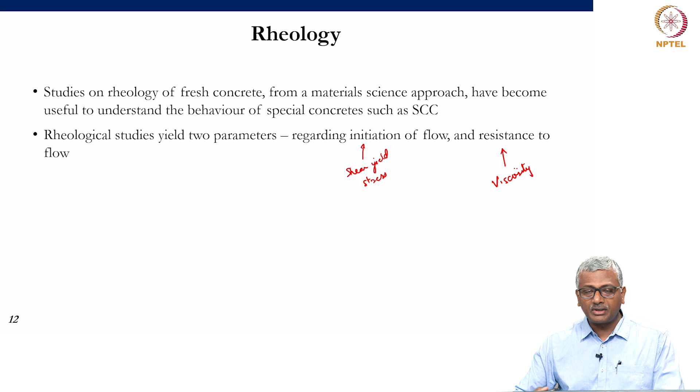Before that, let us look at some models which define flow behavior of construction materials, polymeric gels, and all kinds of flowable materials. You know that water follows a Newtonian behavior - as soon as you shear water, it starts flowing and there is a constant viscosity of flow. Typical rheology plots are drawn between shear stress and shear strain rate, and a Newtonian behavior starts at the origin and is a straight line with a slope equal to the viscosity of the material. Water, oil, all of these are viscous with a Newtonian behavior.

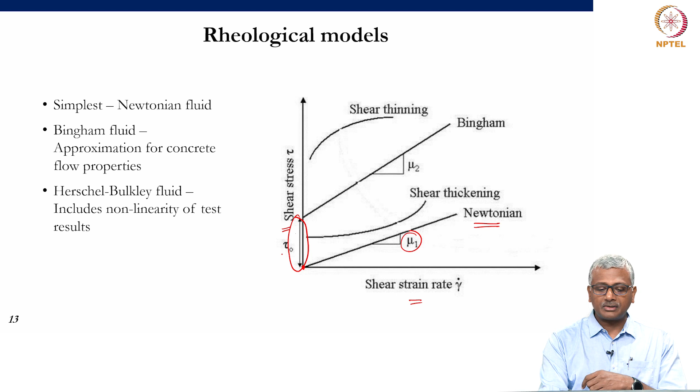A Bingham fluid is a material that has to overcome some initial shear stress, represented here as tau naught or shear yield stress. Once you overcome that initial shear yield stress, the particles can start to flow. And once it flows in a Bingham model, the flow happens with a constant viscosity.

But this need not always happen with systems which are suspended solids in a liquid medium like concrete. You can also get some non-linearity, and for such instances, the Herschel-Bulkley fluid model is often used for concrete. In such cases, you do not have a constant viscosity, but the viscosity changes as a function of the shear rate. In concrete, mostly what we see is a shear thinning behavior, where as the shear rate increases, the viscosity tends to drop.

On the other hand, for certain gums and glues, you may end up having a shear thickening behavior, where when you increase the shear rate, your viscosity tends to go up. But in both these cases, the curve may or may not start from the origin, indicating that the suspensions may have some initial shear yield stress that needs to be overcome for flow to initiate.

Now, in simple terms, let us take a look at what this means physically for concrete. Concrete is a composite material where aggregates, that is coarse and fine aggregates, are suspended in the cement paste. As we said earlier, cement paste flows, and the aggregates are basically carried by the cement paste. So the more the aggregate, the more difficult it will be for the cement paste to carry the materials. That is why when you have more paste, the workability is more.

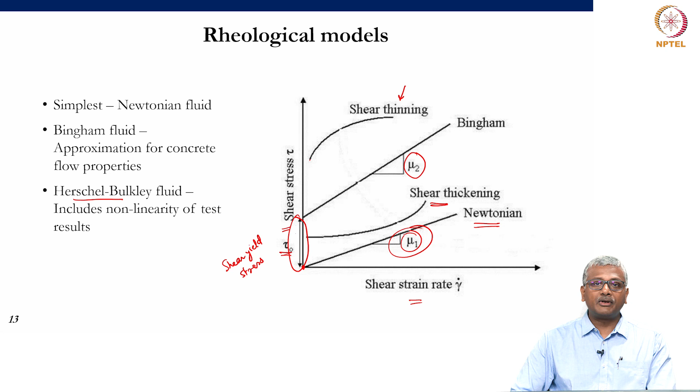That is why we get this relationship here, that viscosity is more or less constant for a laminar flow. The plastic viscosity of concrete can be defined as the plastic viscosity of paste mu naught multiplied by some function of the volume fraction of the aggregate particles. The more the aggregate, the more difficult for the paste to carry this aggregate along with it. So if the paste is less viscous, it still has to carry a lot of aggregate with it, and the overall concrete viscosity will suffer if you have too much aggregate in the system.

For a flowable concrete like a self-compacting concrete, both yield stress and plastic viscosity will be lower. But plastic viscosity cannot be lowered beyond a certain point because that will lead to segregation. So rheological control can help design workability of the concrete in a much more efficient manner, and this can be done with simple experiments. Of course, that is not the target of our understanding here.

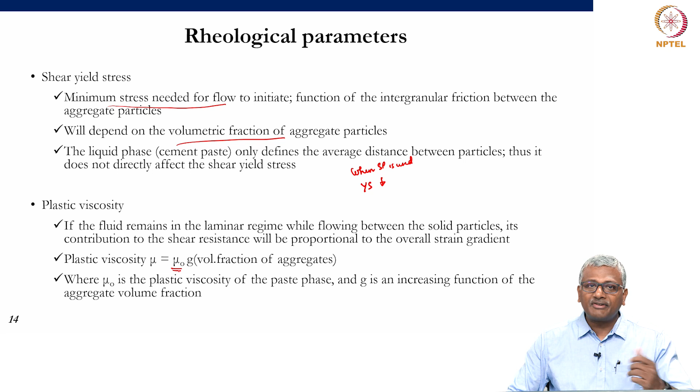When you compare the texture of the recycled concrete aggregate as opposed to a natural aggregate, you can imagine there will be a lot more roughness on the surface because of the adhered mortar. The shape will not be as well defined, because of which the intergranular friction is going to go up. This adhered mortar, which is porous, will also tend to absorb some of the water and cement paste from the surrounding paste. As a result, the viscosity of the paste also will go up, leading to a higher plastic viscosity in the system. So when normal aggregate is replaced by recycled concrete aggregate, you can expect a change in the rheological behavior of the system in terms of both an increase in yield stress and an increase in viscosity.

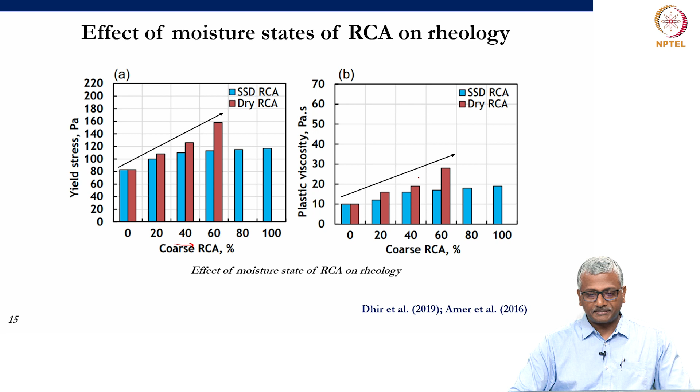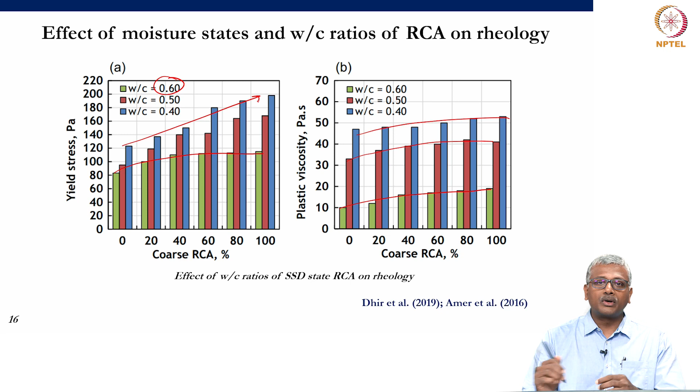Just to get you an understanding of what this is - in self-compacting concrete, because of the extreme flowability, there is a tendency for the aggregates to settle or segregate as compared to the paste. If you do not design your concrete well, that is likely to happen because of the extremely flowable nature of the material. So in a segregation test, what is typically done is the fresh concrete is poured into a bucket. You then wait for 15 minutes, then separate the top one-third of the bucket and the bottom part of the bucket and determine the extent of aggregate that is present in the two locations.

If there is a lot of segregation, the amount of aggregate actually present in the top one-third or one-half of the bucket is not going to be equivalent to the amount of aggregate in the actual mixture. So you can define what is called a segregation ratio.

Segregation ratios depending upon the extent of fine aggregate replacement by recycled fine aggregate did not really vary that much. But in one case at higher water cement ratio, they found that with increase in the extent of recycled fine aggregate, the segregation ratio increased, but it still only ranged between 8.9 and 11.1. It's not really that much.

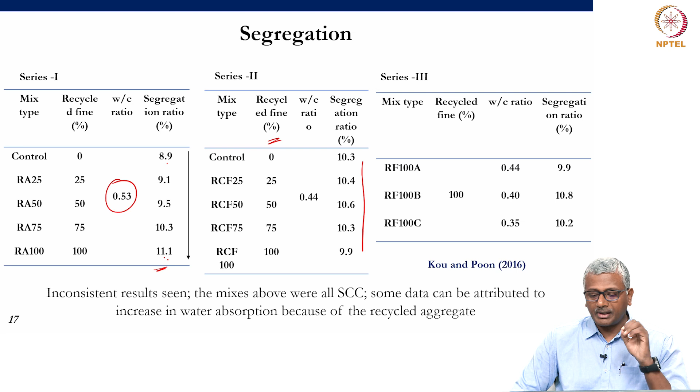Now, when it comes to bleeding, we know that bleeding happens when there is a lot of free water that tends to rise up to the surface. What will happen when recycled concrete aggregate is there? If this recycled concrete aggregate has adhered mortar, it will tend to also absorb the bleed water. So, as a result, when normal aggregate is replaced by recycled concrete aggregate, you should see some level of reduction in bleeding.

Indeed, that is what is shown by the study by Yang et al., where the amount of bleeding was measured with respect to elapsed time. For the control concrete, the extent of bleeding is significant. As you use different types or grades of recycled concrete aggregate, the extent of bleeding comes down significantly. So this goes to show the adhered mortar is beneficial with respect to reduction in bleeding.

This also shows the total amount of bleeding with respect to the relative water absorption in the aggregate. As the water absorption in the aggregate increases, the relative amount of bleeding gets reduced. This again says that the porosity caused by the adhered mortar in the recycled concrete aggregate leads to higher water absorption, and this water is also absorbing the bleed water, thus preventing additional water from rising to the surface.

Now, this can have positive and negative connotations. For instance, when you use concrete with recycled concrete aggregate, you need to be aware that since bleed water is now not reaching the surface, you have to protect the surface early in the case of a flowable concrete, for instance self-compacting concrete.

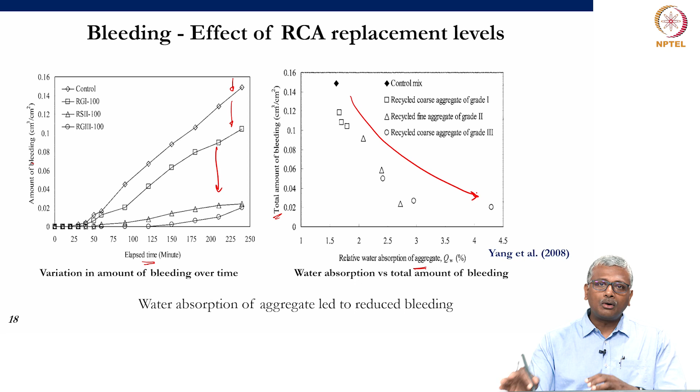Again, air content: you have more fissures and cracks and pores present in the adhered mortar, because of which you can see a minor increase in the air content of the concrete with respect to conventional aggregate. You can see from this data that the effect is not really significant, there is some increase, but it is not really that significant.

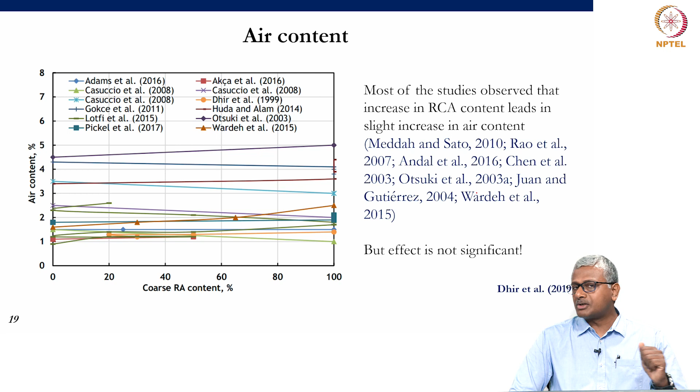As long as you are designing air entrained concrete with proper distribution of air bubbles caused by the presence of the air entraining admixture, you do not really need to worry too much about the fact that you are replacing conventional aggregate with recycled concrete aggregate. It is not going to totally throw away your result of the air content too much.

Now, in some instances, there was a very interesting paper by Huda and Alam, where they looked at the generation of the recycled aggregate. What do they mean by generation? From the landfill, they collect aggregates, which is the first generation recycled aggregate, and prepare concrete with it. They then crush this concrete and prepare the second generation of recycled aggregate and prepare one more concrete with it. Then they crush that concrete and prepare one more recycled aggregate concrete with it. So this is like three generations of recycled concrete aggregate, and what they wanted to see is how the property of the concrete changes as you keep changing this generation of the recycled aggregate.

Here what they saw is there was a minor increase in the air content as compared to the control. When you go for additional cycles of recycling, you tend to increase the air content and reduce the slump. Your slump is reducing somewhat because again there will be a change in the absorption characteristics of the aggregate, and you are probably going to be introducing more air. So there will be an increase in the adhered mortar content as you go for further and further generations of your recycled concrete aggregate.

And because of the continuous crushing and reforming, you are probably increasing the roughness of the RCA also, which is going to lead to this increase in air content and decrease in slump. But of course, this is only a study done out of interest. You don't probably know when you collect aggregates from a dump yard how many times they've been recycled. You have no idea. But you need to study if the aggregate characteristics are good enough to be used in concrete and then design your concrete accordingly.

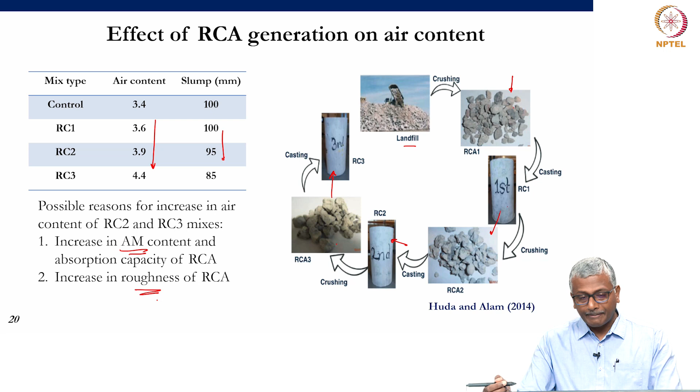Now, when you replace conventional aggregate by recycled concrete aggregate, it is expected that the density of the concrete will drop. Why is this? Because adhered mortar is present, there will be water absorption, there will be higher porosity because of the water absorption. Water absorption is not the critical factor for density; it is more the porosity introduced by the adhered mortar that will lead to the lowering of overall density. So you need to be aware that your density will change when you replace conventional aggregate with recycled concrete aggregate. When you do better processing of your recycled aggregate, the differences in density will not be that significant.

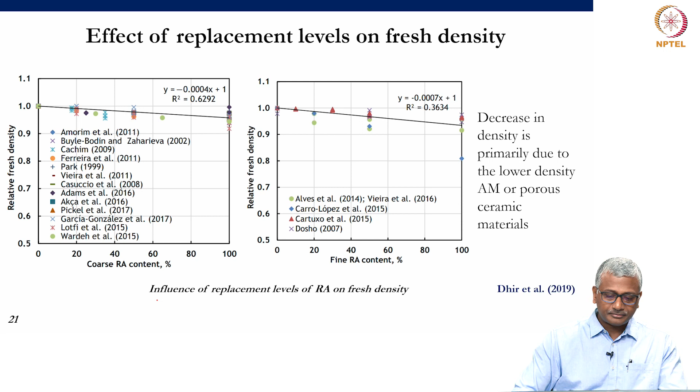Now, let me show you a case study of the use of recycled concrete aggregate in an application at the other end of the spectrum. I talked about flowable concretes and high workability, but let's now talk about a very stiff concrete such as roller compacted concrete, where the concrete is dumped and then compacted with rollers.

Primarily it's used for roller compacted concrete pavements, which basically have zero slump. That means workability is zero, or very harsh mixes, with low water content. Typically even the cement content is quite low because you don't really need so much cement to produce the workability. You just need to control water to cement ratio to get the strength, but the entire concrete is getting compacted to a very high level of densification. There is typically no reinforcing steel in such concrete because it's used for applications like pavements and dams.

And you can actually make it strong enough because of the kind of compaction process that you give. Because of using lower cement, you are reducing the costs significantly. And because there is less cement, there is also going to be less heat emanation from the concrete. So there is a lot of advantage of roller compacted concrete pavements as opposed to typical concrete used for pavement quality construction.

So what essentially can be done in roller compacted concrete pavements, because you do not need much slump at all, is think about utilizing recycled concrete aggregate for such purposes. But the issue is you need to figure out whether the roller compaction, the application of pressure by the roller, is going to be as effective in concrete with recycled aggregate as it is with conventional aggregate. So now, is your recycled concrete aggregate affecting compaction? That is the challenge in recycled concrete roller compacted concrete pavements.

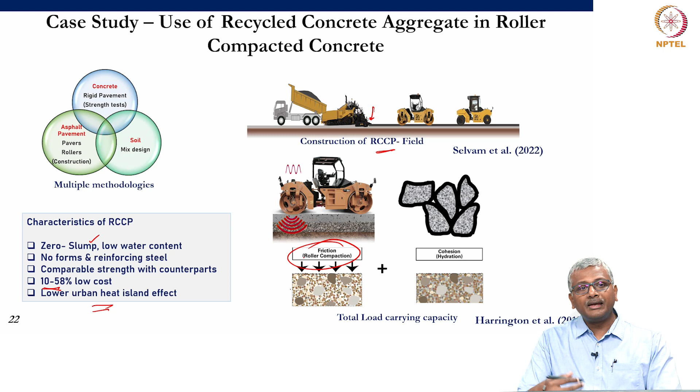We earlier talked about workability, but compaction, as you all know, is also a feature which defines workability. So let us take a look at what happens when recycled aggregate is used in roller compacted concrete, and whether we can achieve the same level of compaction or not.

So now what we can try to do is design the roller compacted concrete pavement with an optimal choice of gradation of aggregate. We typically work with coarse aggregate of two sizes, 20 millimeters and 12 millimeters, and one fine aggregate less than 4.75 mm. So now you have three different blends of material that need to be proportioned in a way that gives you maximum compaction, which generally can be achieved by maximizing what is known as the packing density of the aggregate.

Now what you are simply doing is, let's say you have a container, you are filling the container with coarse particles first. There are voids and gaps between these coarse particles which you have to identify properly, understanding what voids will remain after efficient packing of this size particle. Those voids you start filling up with smaller particles, and then you recognize the voids in that mixture and fill it up with even smaller particles, and so on. So essentially you are adjusting your sizes so that the voids left behind by one size are nicely filled up by particles of the smaller size, ad infinitum.

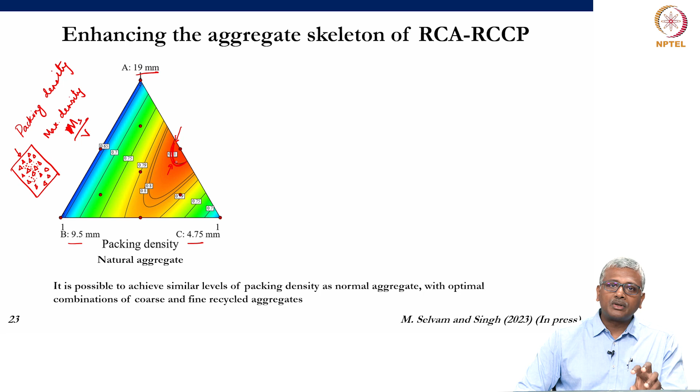What you see here through this ternary diagram is that you are able to achieve, for certain compositions, a packing density of 0.81. That is a contour of packing densities that can be obtained by combining aggregates in proportions leading to this packing density. So what you need to do is understand the particle gradation of your recycled concrete aggregate and design the proportion appropriately to get the maximum packing density.

In this study, for normal aggregate, the packing density obtained was 0.81 for an optimal choice of fine aggregate and coarse aggregate. For instance, 19.5 millimeter aggregate was about 35%, 9.5 millimeter aggregate was 15%, and fine aggregate was about 50%. At this level, they got an optimal packing density of 0.81.

That means if you take a volume of container, 81% of the volume is filled up by solids of the aggregate, or you get 19% voids in the system. So you can think about maximizing packing density as also the same function as minimizing the void fraction.

Now when you have recycled concrete aggregate of different proportions, here only recycled coarse aggregate was used, of two different sizes, 19 mm and 9.5 mm. You can see that for 40% 19 mm aggregate, 15% recycled concrete aggregate of 9.5 mm, and natural fine aggregate at 45%, they are able to get the same or even better packing density compared to natural aggregate.

Similarly, for proportions of normal concrete aggregate, normal coarse aggregate at 30% and about 25% in the case of coarse aggregate, and about 50% of the recycled fine aggregate, you are now able to get the same packing density as the normal aggregate.

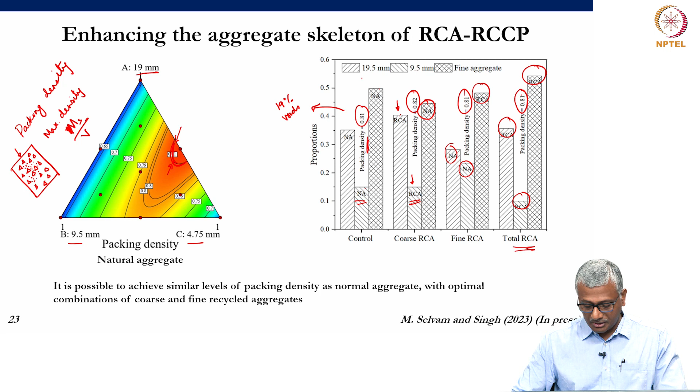Now, you can also optimize moisture states of the RCA. We know that because of the adhered mortar content, the recycled concrete aggregate may have a lot of surface moisture, and that needs to be compensated by achieving a saturated surface dry state.

But when you design concrete with chemical admixtures like superplasticizers, which tend to adsorb on the surface of cement particles and also aggregate particles and lead to a repulsion effect, does that help us in achieving better compaction in roller compacted concrete? We saw that packing densities could be achieved, but when you actually do the concrete mix design with cement, chemical admixtures, and water, are we able to get the same level of compaction or not?

So generally, the use of superplasticizers will improve the lubrication effect, not just in cement or cement paste, but also in concrete, because superplasticizers also tend to get themselves coated around aggregate particles and provide some level of steric repulsion.

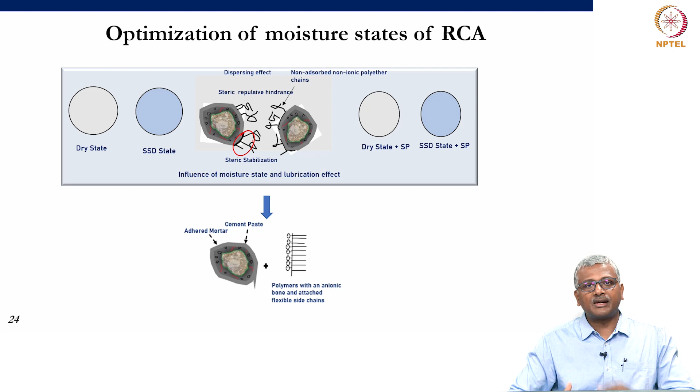Okay, so in this study what was done was the Vebe density. Vebe is basically the apparatus used for determining the workability of very stiff concretes which are harsh.

In such cases, for the control mix with natural aggregate, the Vebe density was nearly about 2500 kilogram per cubic meter.

When the moisture state of the aggregate was dry and the same concrete was prepared, the Vebe densities were lowered. But when SSD was used, Vebe densities could be increased, but not to the level of the control concrete with normal or natural aggregates.

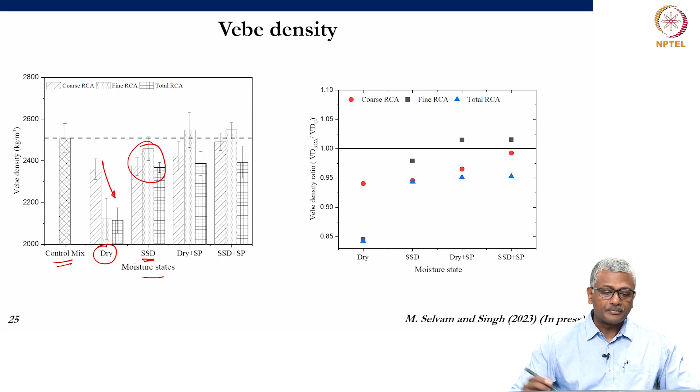When superplasticizers were used, the degree of compaction could be achieved significantly, so the densities achieved were now closer to that achieved with normal aggregate. This is very good, because it tells me I can design roller compacted concrete pavements with optimal control of superplasticizer dosage to produce compaction levels equivalent to normal aggregate concrete.

This graph shows the density ratio in terms of concrete density with recycled concrete aggregate versus concrete density with normal aggregate. A ratio of one indicates it is equal to that of the normal aggregate.

As I change from dry to SSD to dry plus superplasticizer and SSD plus superplasticizer, I am going closer and closer towards the density level achievable with normal or natural aggregate.

What this shows is that compensation for moisture absorption by making the aggregate saturated surface dry, combined with use of superplasticizer, is able to achieve recycled concrete characteristics equivalent to normal concrete.

So please remember, when you use recycled concrete as aggregate, to avoid any ill effects on workability or compaction, make sure you are saturating the aggregate well enough to get a complete saturated surface dry state, and use a superplasticizer to get the required degree of compaction.

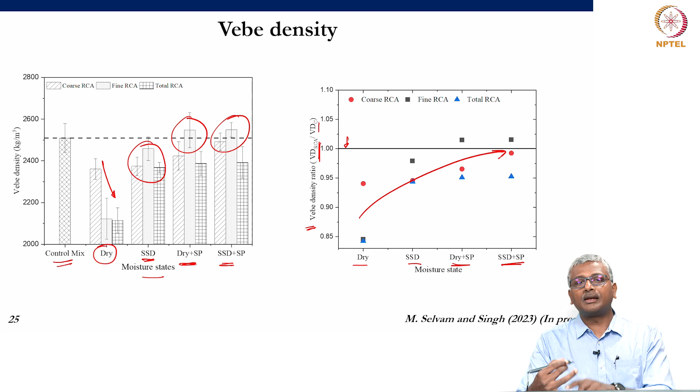In this study, interestingly, the effect on cement is also significant, because as you can imagine, when the polymer chains of the superplasticizer adsorb on the cement grain, they lead to either electrostatic repulsion or steric repulsion depending on the chemical added. The same characteristics hold for their coating on the adhered mortar surfaces of recycled concrete aggregate.

So the use of superplasticizer not only affects the density and gets it to a level equal to conventional aggregate, it also helps in actually achieving a good property from concrete in terms of tensile strength. Let me rub this off so you can see the next graph.

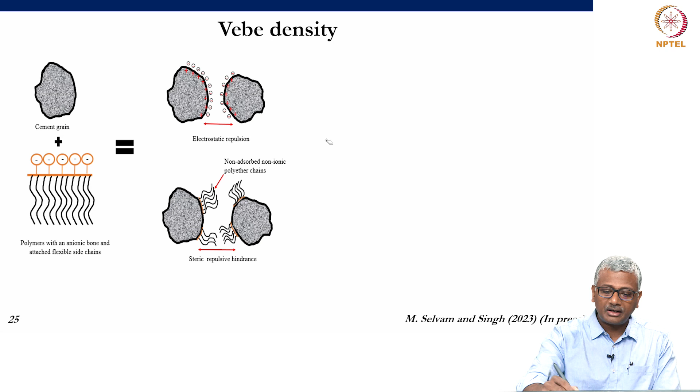It also tends to help you achieve good tensile strength. Here, indirect tensile strength, or split tensile strength by the Brazilian technique, was determined for concrete with normal aggregate and concrete with recycled concrete aggregate, for roller compacted concrete.

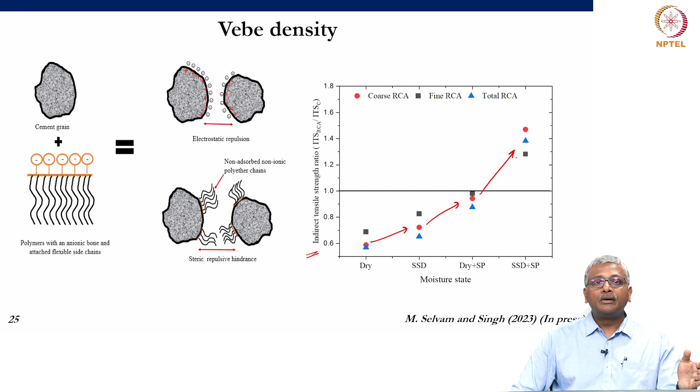You can see that as you change the moisture state from dry to SSD to dry with superplasticizer to SSD with superplasticizer, there is a significant increase in indirect tensile strength. This shows that you can optimally design roller compacted concrete pavements with recycled concrete aggregates when you take care of the SSD condition and also use a superplasticizer.

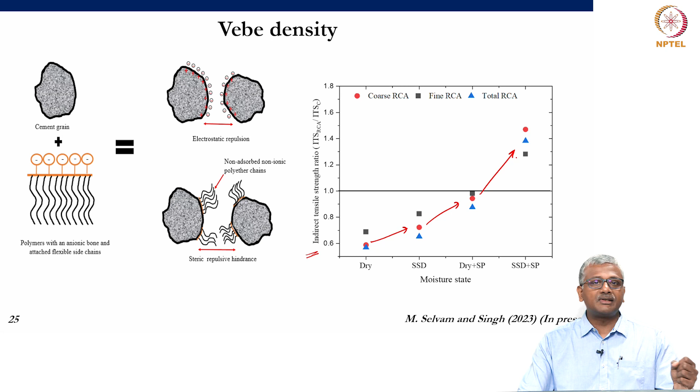This effectively leads to the fact that you can design concrete mixtures with recycled concrete aggregate, keeping in mind mainly that the adhered mortar leads to an increase in water absorption. Compensating for that becomes the primary target.

I think we will finish up with that. I have reiterated this significantly over today's lecture, that the presence of adhered mortar is what makes for the difference in workability levels between concrete with normal aggregate and concrete with recycled concrete aggregate.

The levels of change may be quite different when using recycled coarse aggregate or recycled fine aggregate, but in most cases the cause of that effect is the same: primarily the adhered mortar and cement paste along with it, which brings about a change in the behavior of concrete with recycled aggregates.

All this has to be understood through a proper mix design process before using recycled concrete aggregate for a particular project. But there is nothing to fear in terms of being able to design concrete with recycled aggregate. There is sufficient knowledge and understanding of the subject at our disposal, and all you need to do is apply that understanding while designing your mixes appropriately.